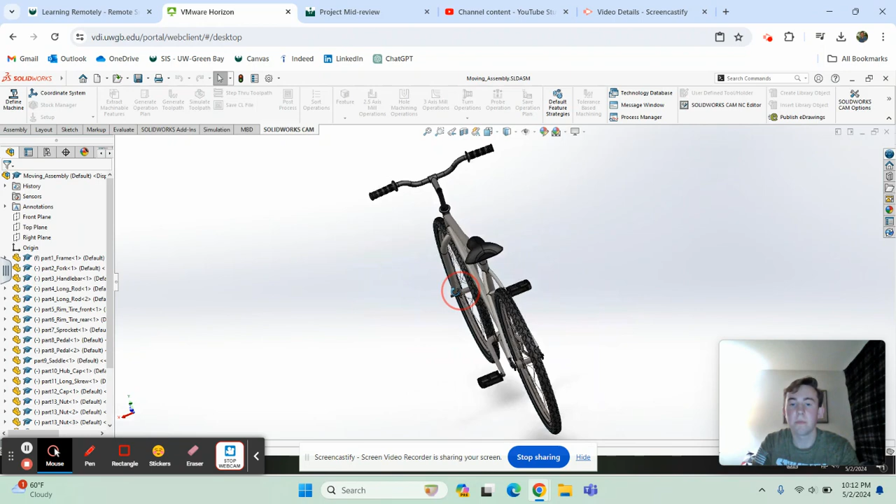Opening the moving assembly here, I have my completed bicycle that I made in relation to the current bicycle that I own, a Trek Verve 3. It comes in this gray color, and I've incorporated my own design partially because of technical specifications that were not provided for the actual Trek bicycle.

So the features that I have here: in my frame part, I used loft and sweep mostly. The loft is in the back part that holds the tire, and the sweep is also in the back holder for the rear wheel.

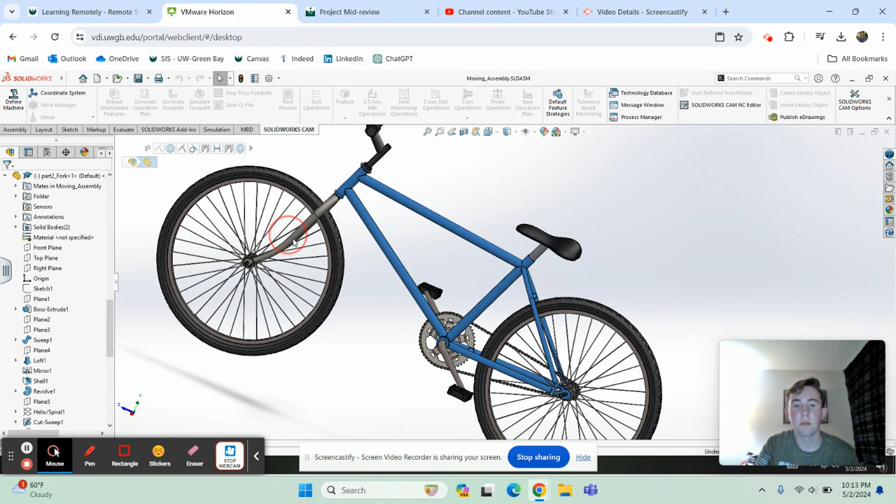Then the fork section, this front part here. I also used the sweep and loft for that.

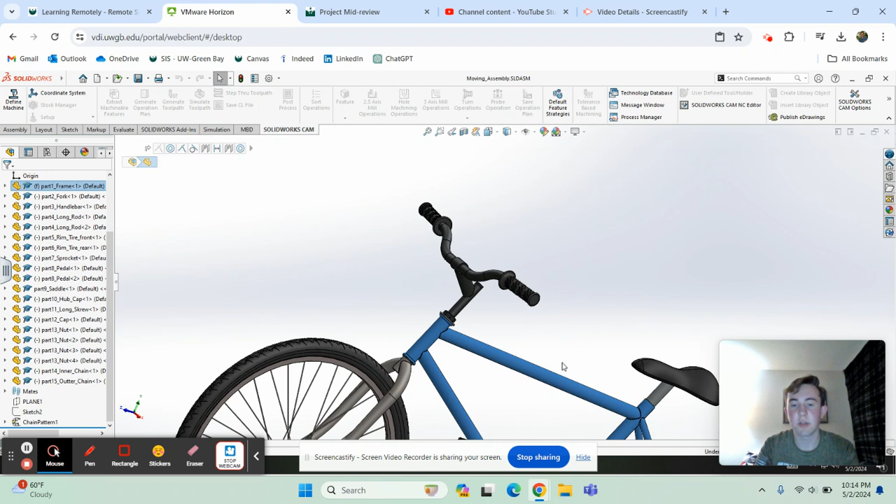Going to the handlebars, and also with the whole frame, I used the shell feature to clear out the middle of it. On normal bikes they're shelled out to make it more lightweight, and lightweight is the biggest thing for a bike.

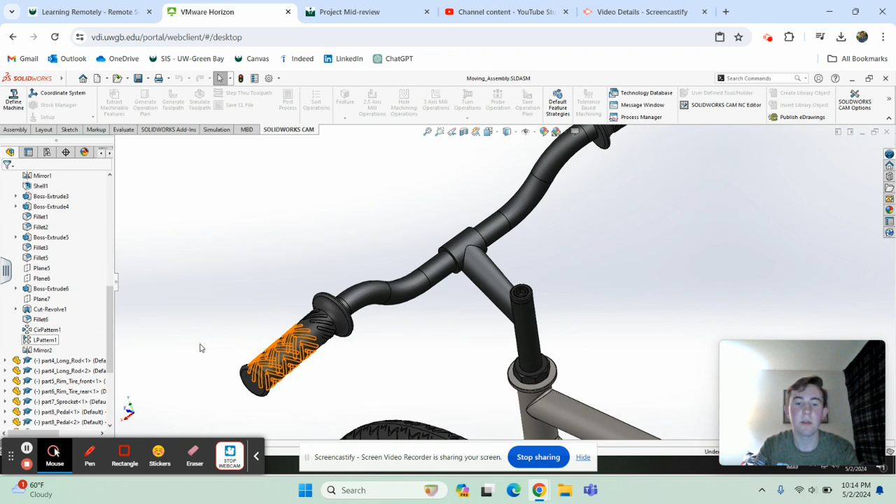So for the handles, I also used the sweep and loft. Let me find my handlebars here. I also used a circular and a linear pattern to describe the grip on the handlebars.

Then for my smaller pieces that I used to assemble, like the screws and the long rod.

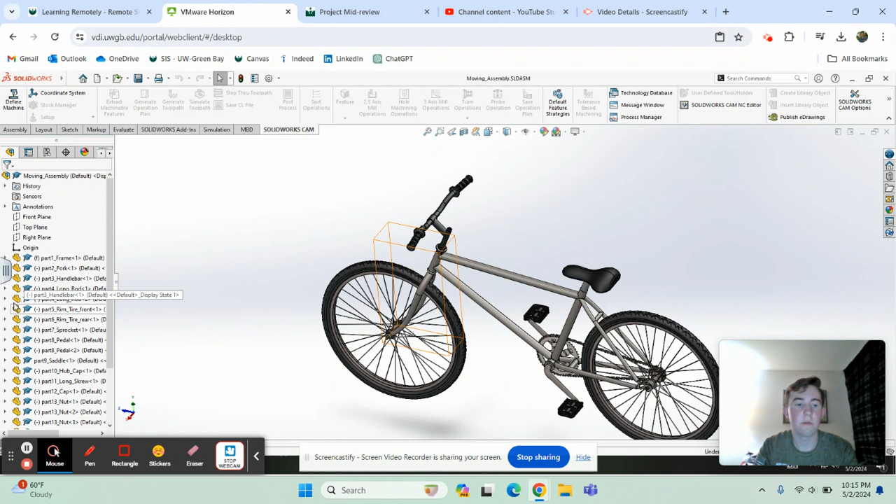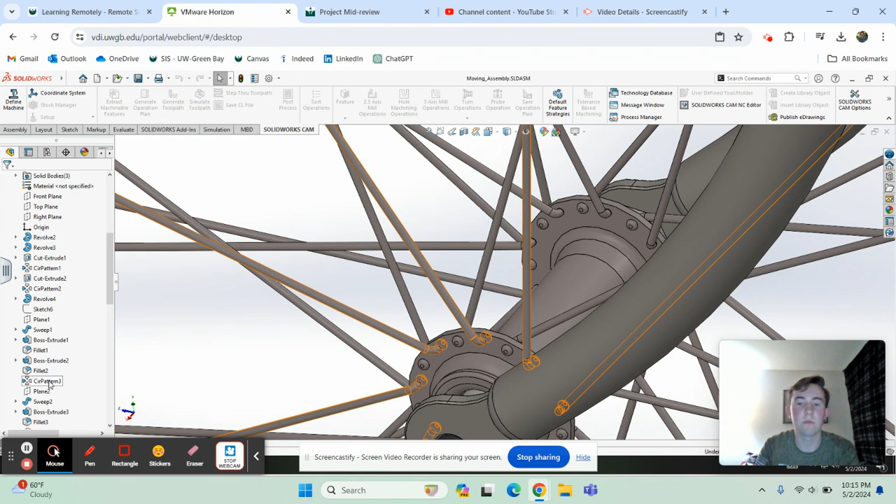So then the first tire - one of the big things for this was I had to individually create these spokes, not for all of them, because I eventually used a linear pattern or a circular pattern to wrap them all around. But I did use the sweep feature to bring it out and extrude it. That's pretty much it for that.

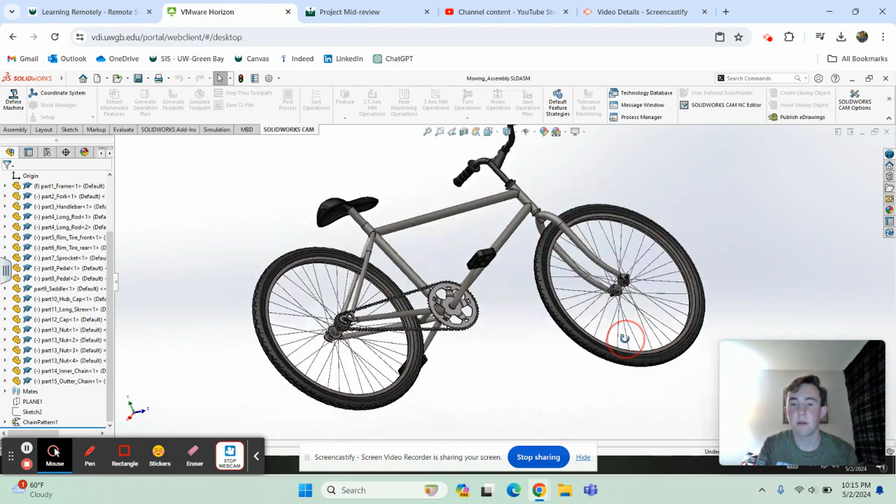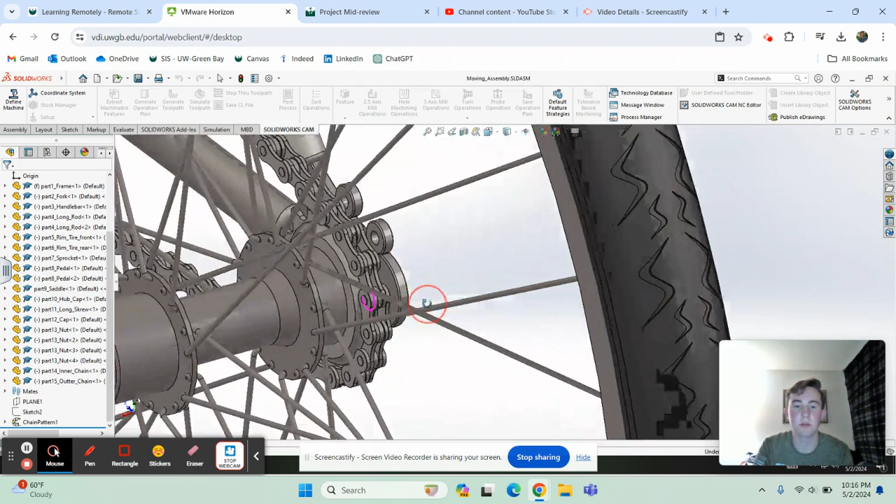Then same for the rear tire, but on the rear tire I also had to add this gear to hold the chain. I added that right away instead of having it as an added component, because on the actual bike it does look like it is automatically attached to it, like it's a part of the tire and not a separate part.

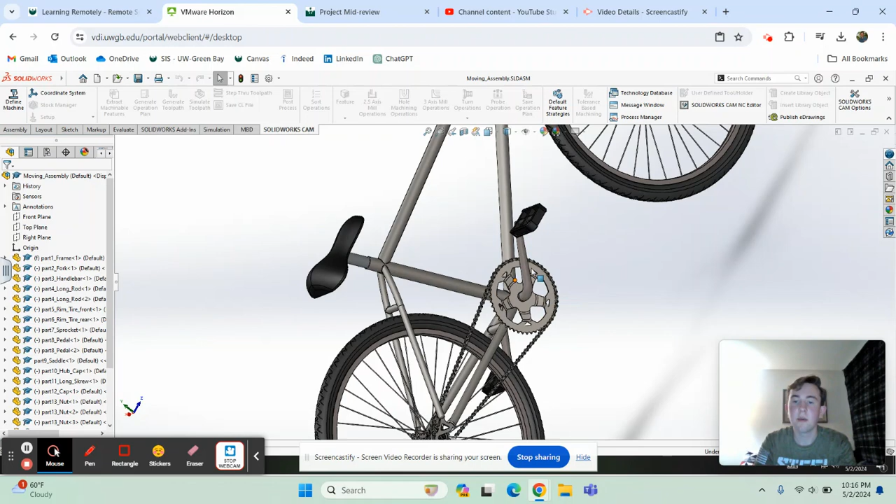Then because the pedals, or the sprocket, which is the part that holds the pedals and also has the chain gear, or the large gear - another thing I didn't do on this, just for time's sake and complexity, is add multiple gears to make this a gear shifting bike.

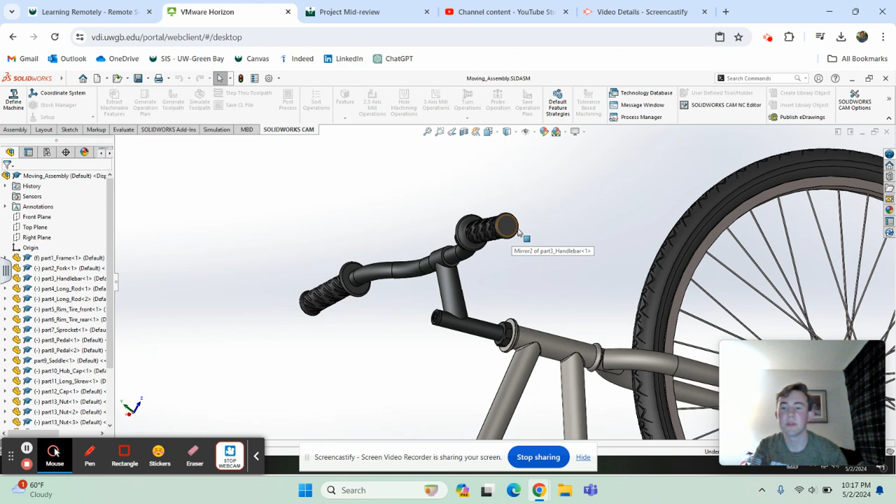I also did not add anything to the handlebars, just made them very basic handlebars, and that was part of the features I added on my own that differed from the actual Trek bike I was intending to design.

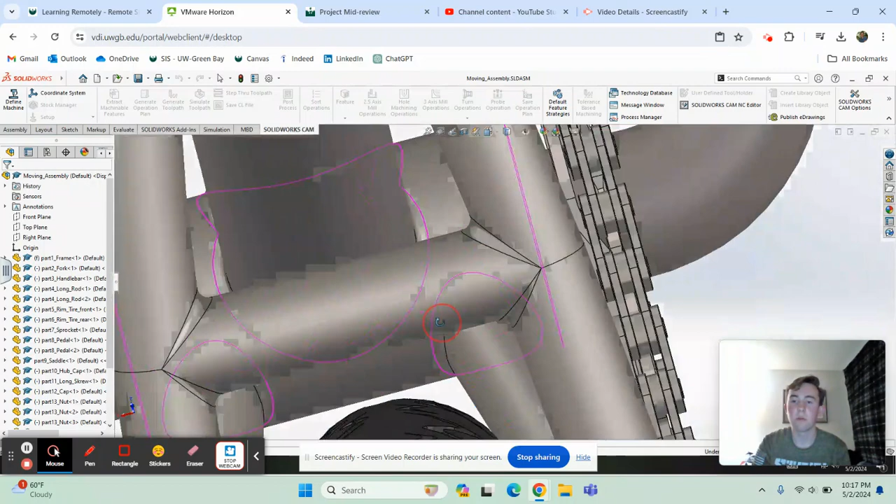So then with the sprocket, I used the sweep feature, the linear pattern, and the circular pattern. I made these gear teeth with thought of how this would fit into the chain.

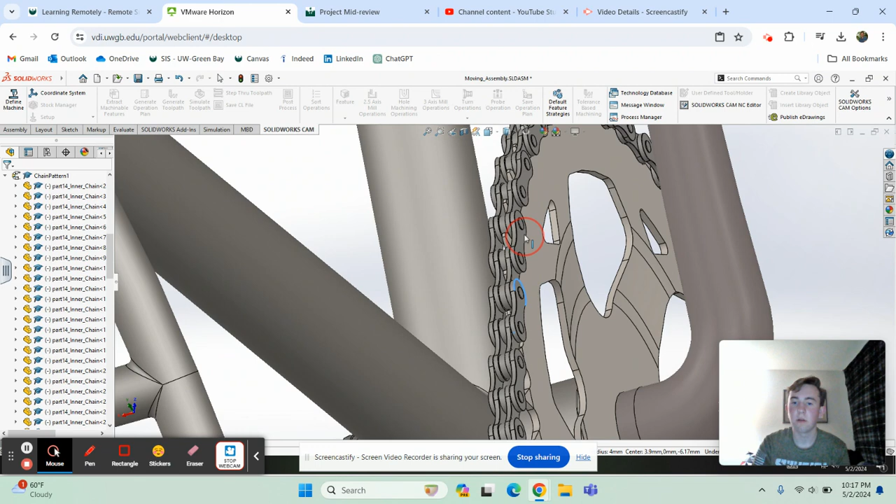You can see here, I can move the chain - I should be able to, yeah. So I can move the chain. I did not have the chain move with the gear. And then I can also move the pedals too, and the pedal will also move the tire and the gear. I do have those connected. I just was not able to connect the gear with the chain. And the pedals also move freely around.

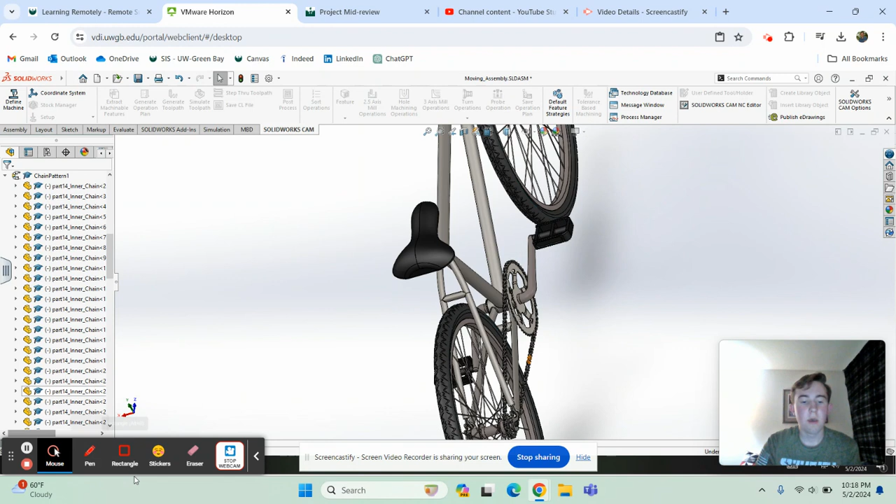Then that was about it. I have my seat, the pedals, and the chain. When I was making the chain, I had the outer chain and the inner chain, and then I put them in a chain pattern.

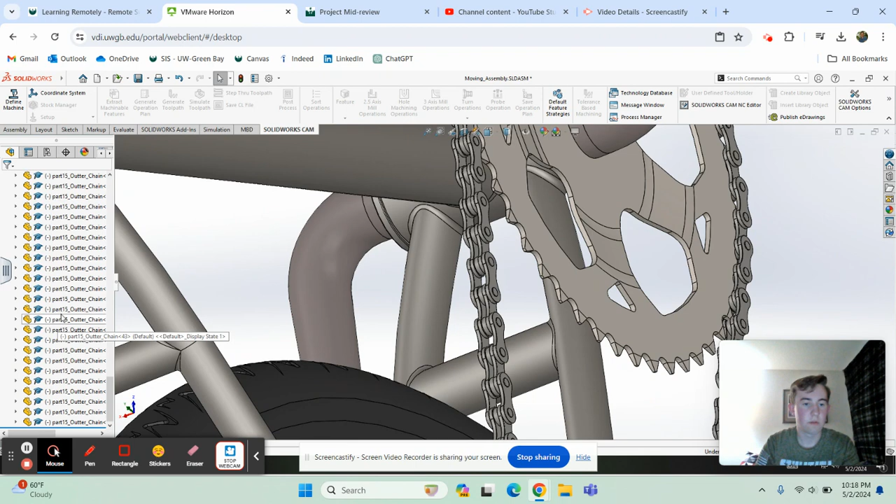I can try to get to here. Oh, maybe not - oh yeah, chain pattern. So that's where I had to do a separate sketch where I drew a small circle and a big circle, connected it, and was able to line up the chain to connect to each other link and connect through it.

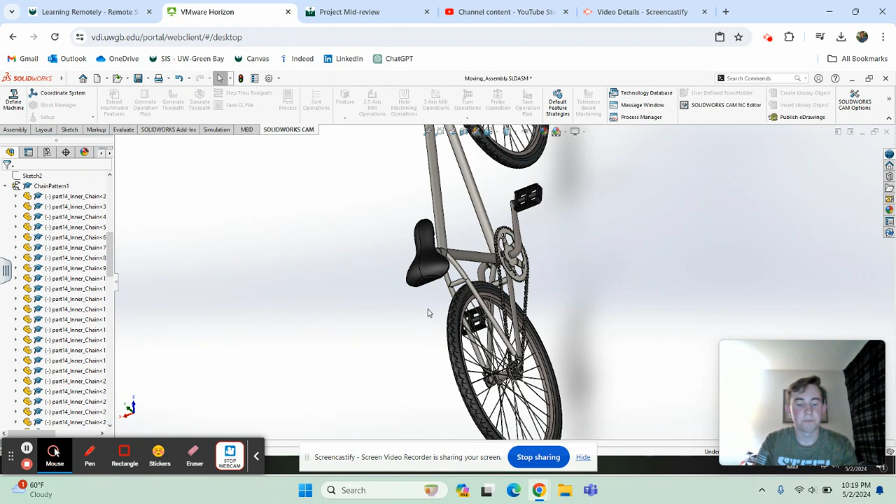So as I said, that is pretty much it for this project. My cool feature, or highlight, about this project was that it was an inspiration from my current bike, and also the fact that I am in the process of hearing back from an internship for this summer to work at the Trek facility in Waterloo, Wisconsin.

As I'm going into mechanical engineering, I wanted to get something relatively similar, and I would be going for a manufacturing engineering internship to work on production for these bikes.